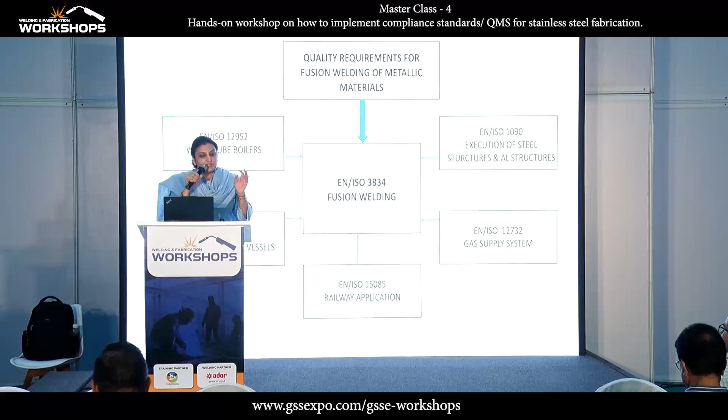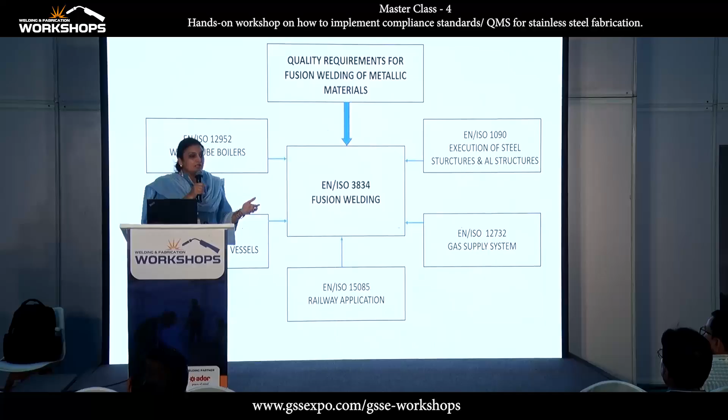For all of you who are here, I would like to introduce Mr. Pandita. He is a person of excellence with knowledge and expertise. It's not just theoretical knowledge, but practically implemented and implementable knowledge that we put forth today. The main problem for the fabricator is how to convince their vendors or whoever they are supplying to that they are compliant with the codes and standards they are supposed to follow. There is a lot of confusion which we want to clear today through this session. I'm sure those who are attending will go back with clarity.

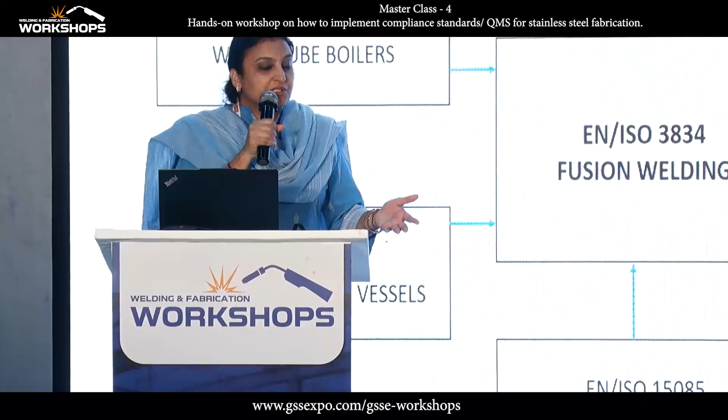I think that's somebody here. I have 48 years of experience in fabrication, building and quality, working with various companies on quality.

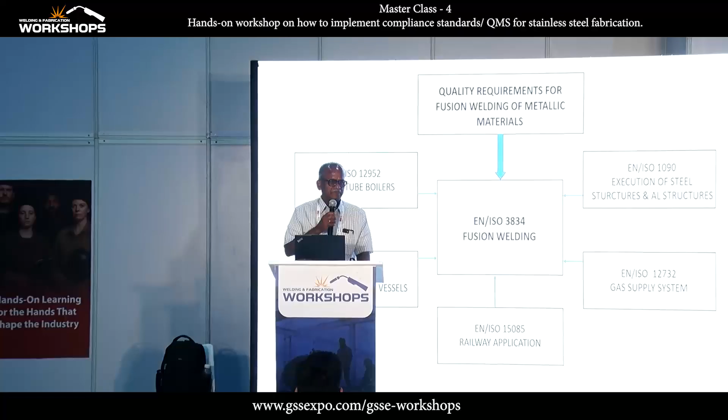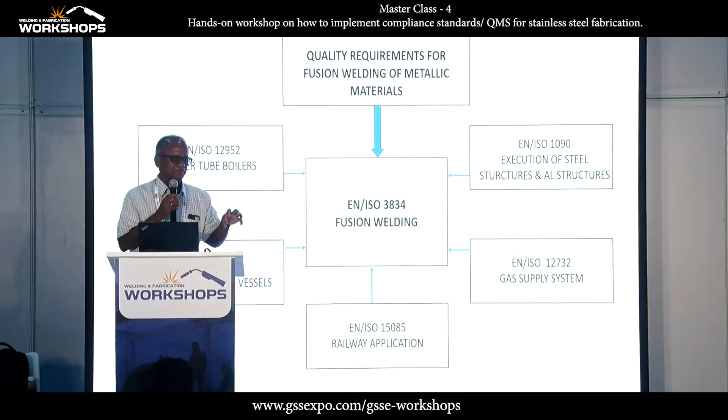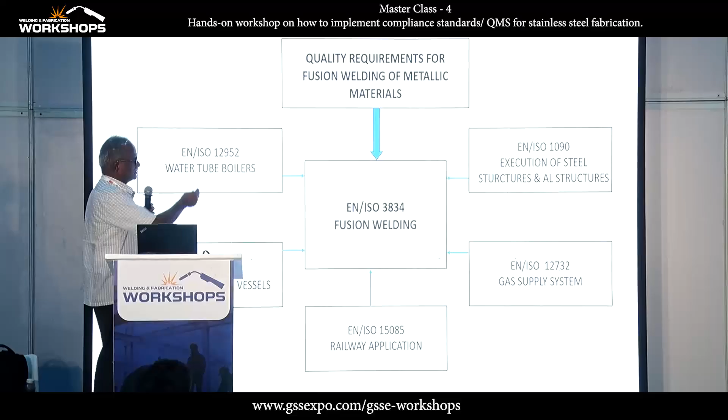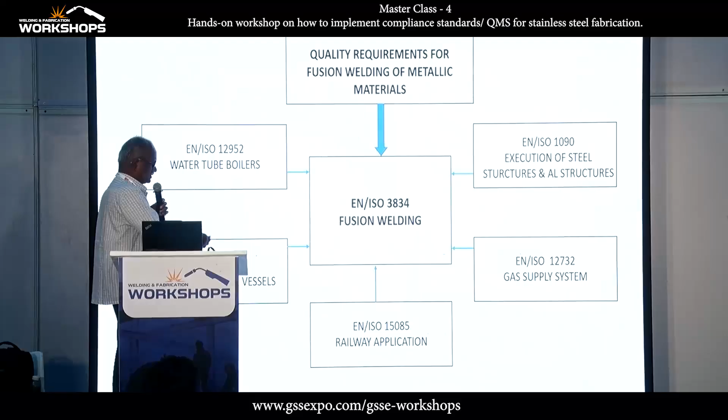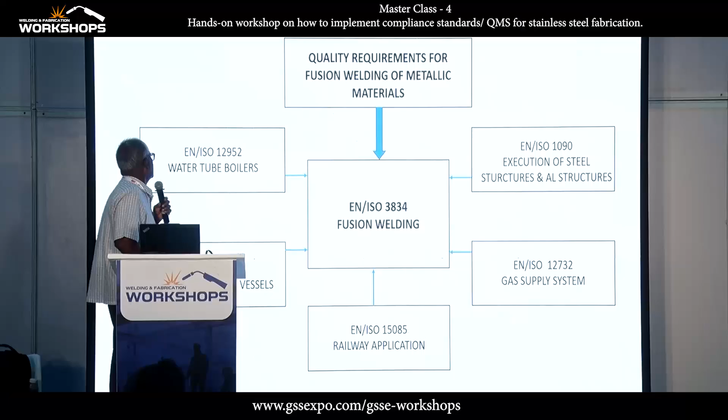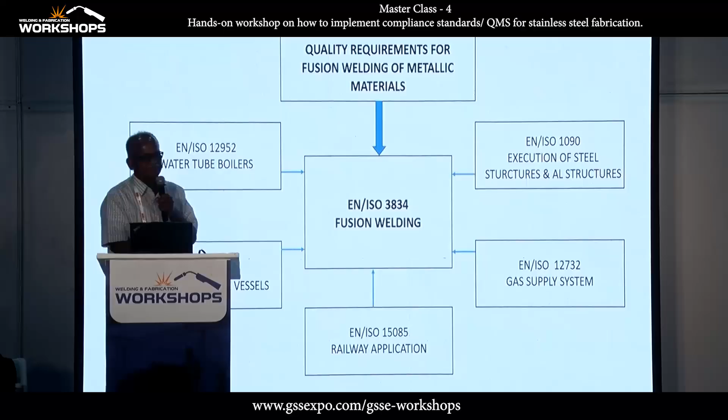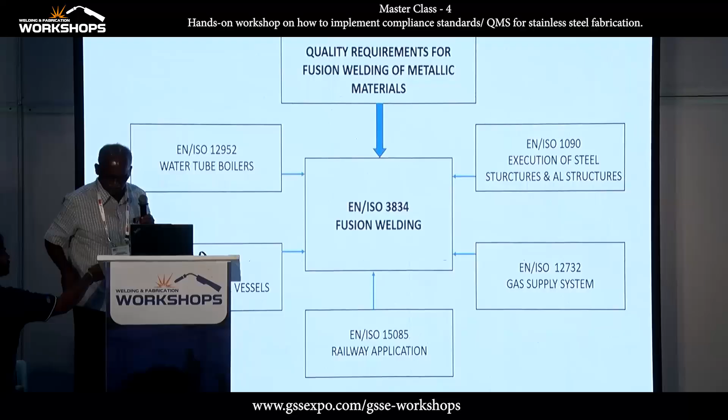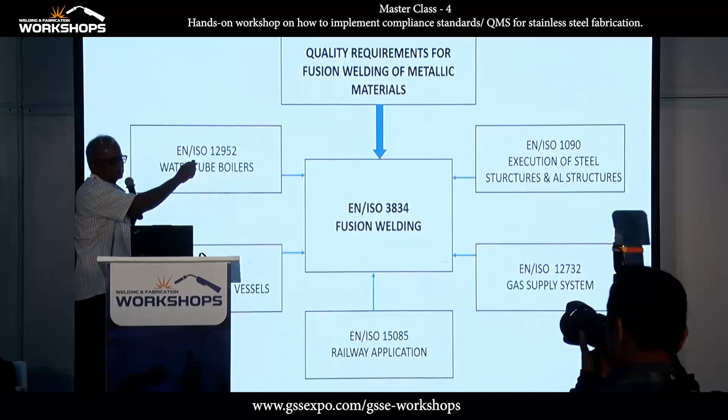This is not really fusion welding. You might be knowing fusion welding and solid state welding as well. This takes place through welding above the melting point of the material, but solid state is below the melting point of the material, like resistance welding. We'll go further.

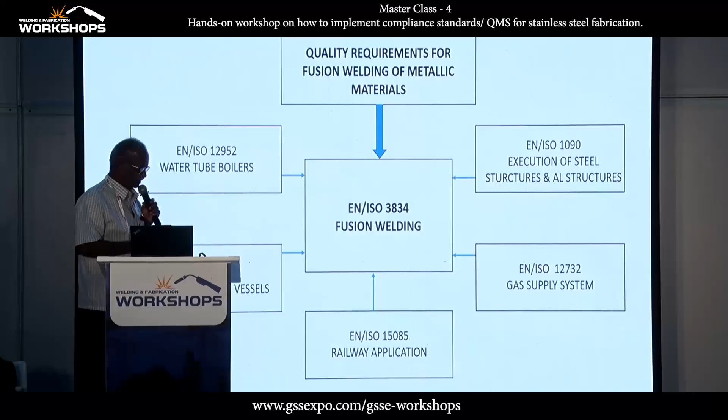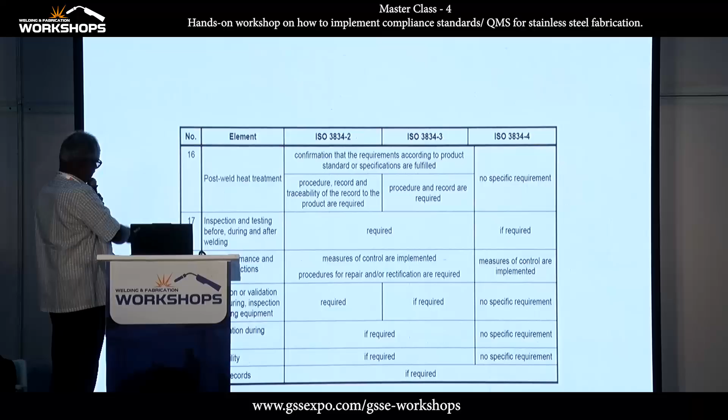After all this, there are three quality systems there. It's a comprehensive standard, generally used, but really it's in pieces — there are now 22 elements in this.

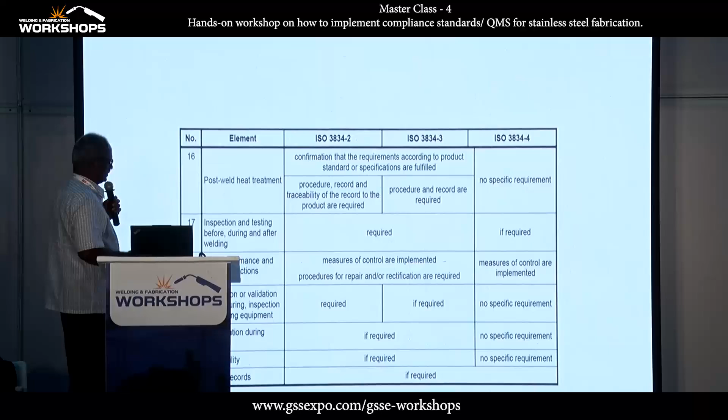You just take the top points. Once you get the purchase order from the customer, you have to read it and understand what has to be done. You have the facility, and it goes one by one. Suppose the fabricator needs some technical review, then subcontracting — if you want to give it to subcontracting, you have to decide at that stage. Everything has to be decided at this stage.

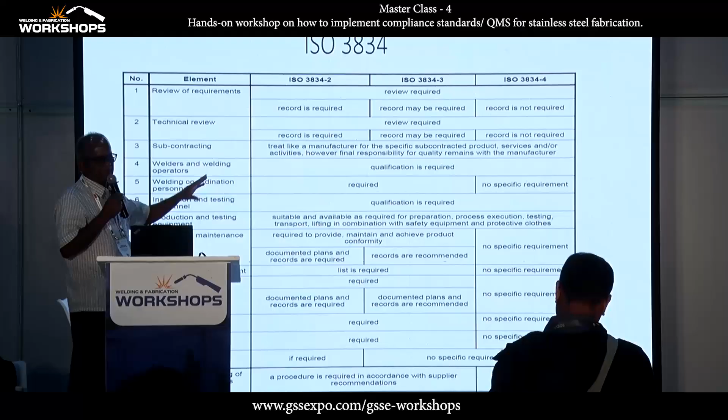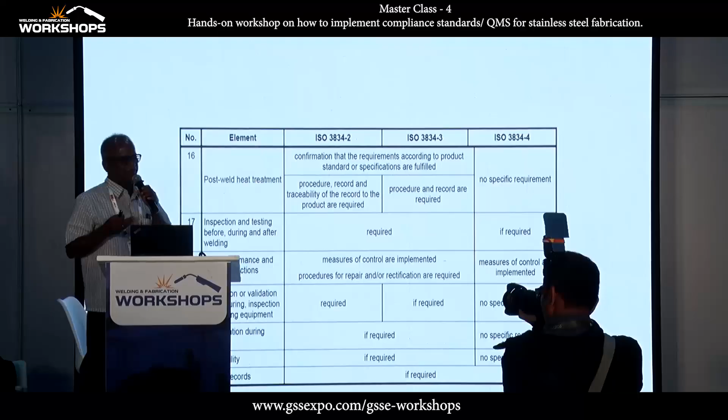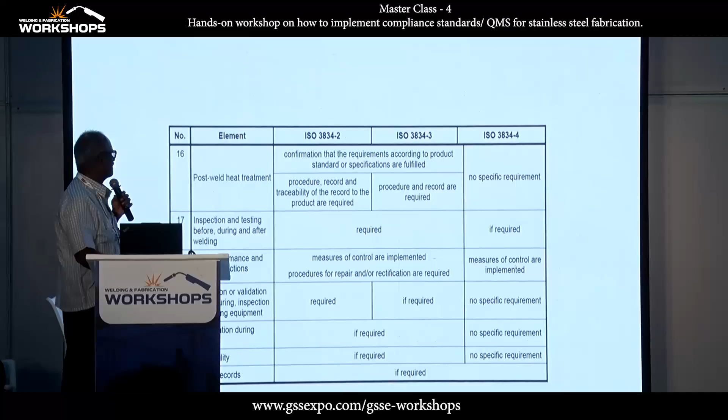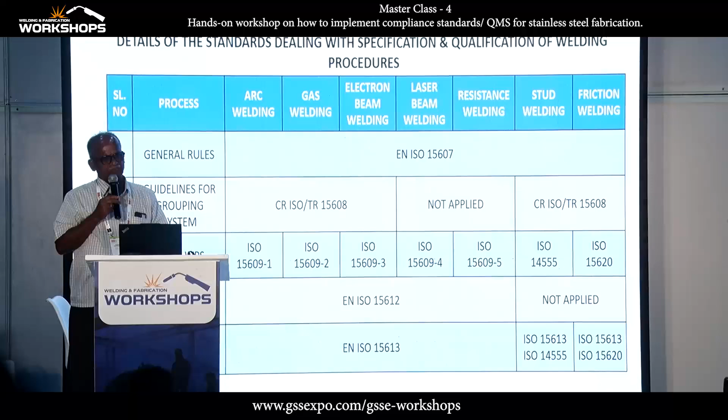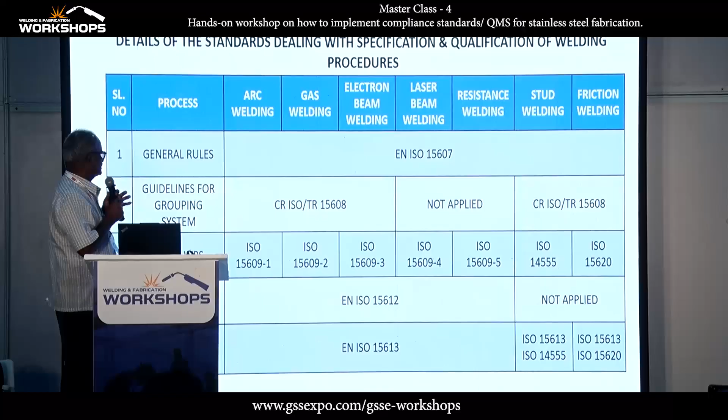607 doesn't give a lot — how to qualify the WPS, yes I can do it. 15607, but this is not good, not the better thing. You see, in ASME there's a lot of different sections. In ASME, you can refer to only 5 books — that's enough. For qualification, one book is enough, Section 9 is okay.

Then for pressure vessel and heat exchanger products, you go by Section 8; for boiler, Section 1; for nuclear, Section 3, and so on.

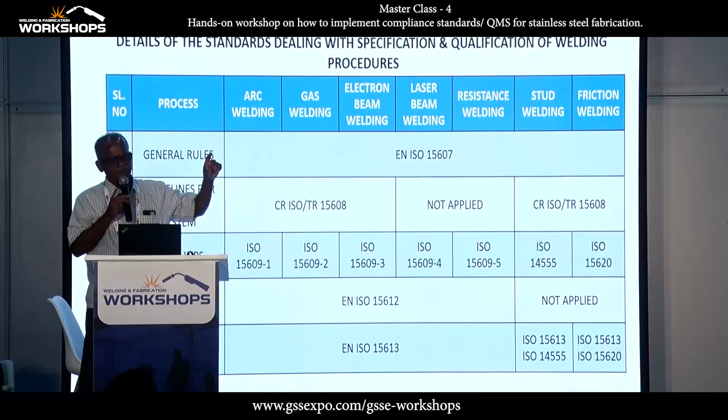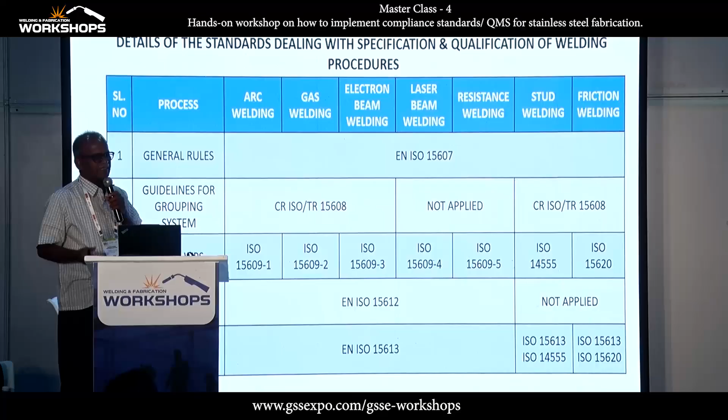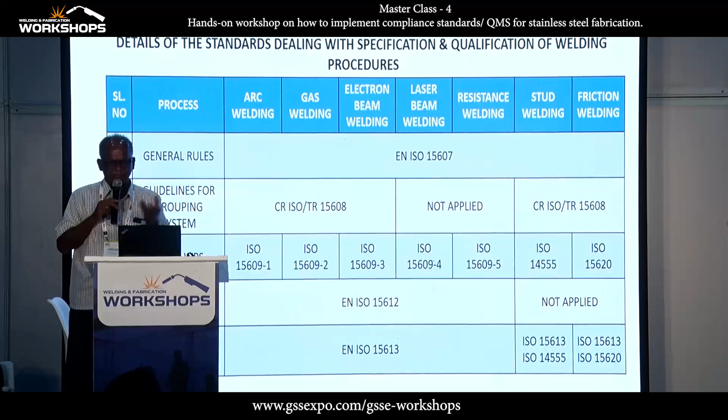If the ASME, I think you might have come across, you weld the PQR, we may not write any preliminary WPS or anything, just let them start that one. But here you have to do the preliminary WPS you have to write before starting the WPQT, welding procedure qualification test.

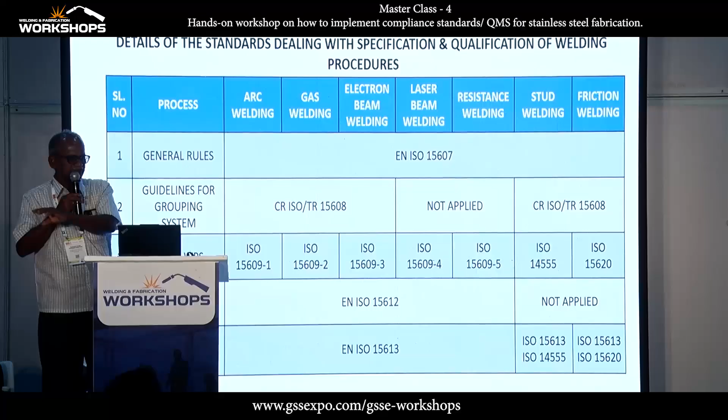Here, WPQR will have the range. In ASME, PQR will not have the range. Only WPS will have the range. We might have come across that. Here, WPQR will have the range. Suppose 10 mm you have done, 5 to 10 mm that range, for example, will be on PQR, not on WPS.

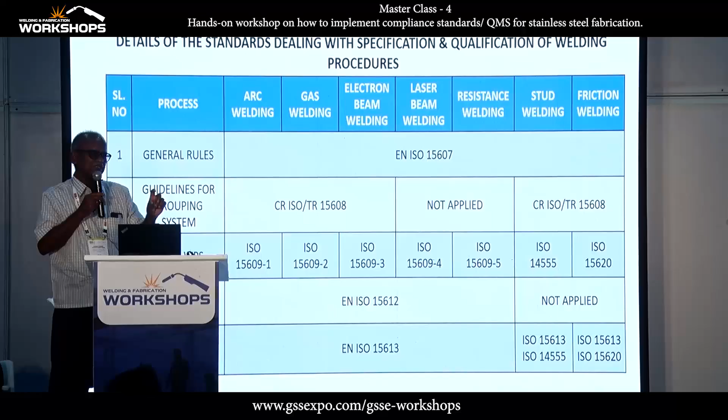But here, in ASME, PQR will not have the range, it will have only actuals, about 20 or whatever. WPS only will write there. That's the difference between these two.

Then first you have to write the pre-WPS. After seeing your drawing, about thickness or active material, all you have to see that. Then you make a preliminary welding plan and fabricators. Then only you can visualize how many PQR you have to do there, for whatever process you get involved on that. Unless you get the preliminary welding plan, it is difficult to find out. By experience, people do not only rely on the paper.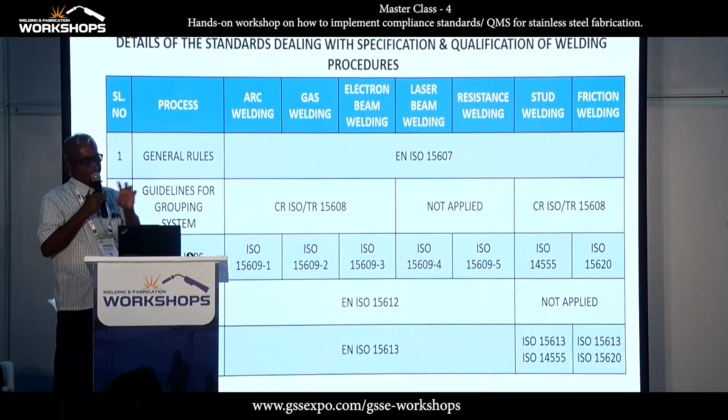That's a different issue. But here it is always better, even for ASME also, not only all the requirement in the form of weld map or weld plan, whatever we say. Then from there you can start the pWPS.

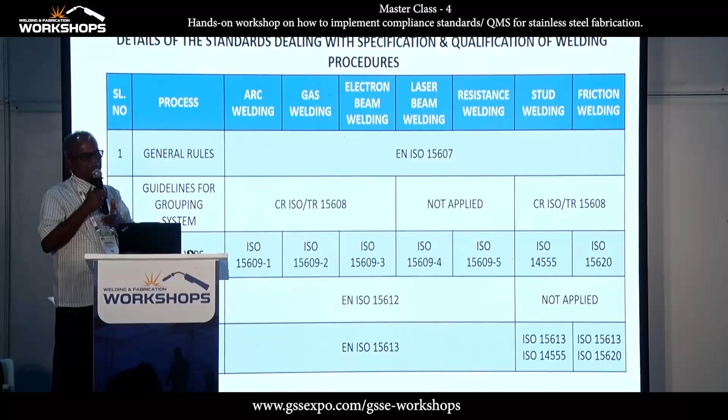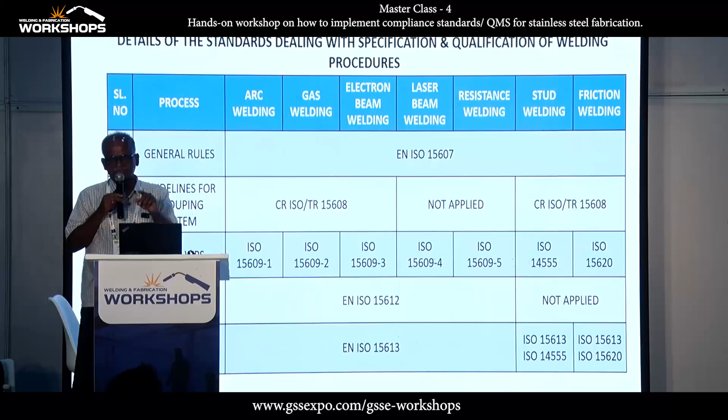Then welding procedure qualification test, actual test, what is that. The difference is the examiner, outside examiner or inside. Company has appointed a person like you to be an examiner for the witnessing, certifying all the things. Otherwise, it should be independent of the production, another thing. Otherwise, outsiders, not of outsider, third party inspection, they have to examine, audit, they have to witness.

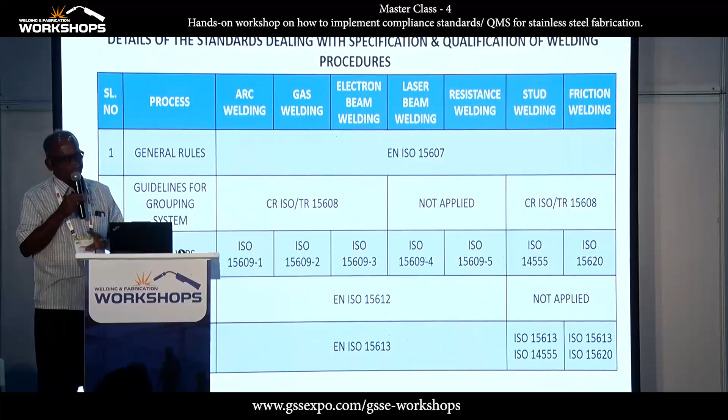Did this. But in ASME, the manufacturer has the responsibility. They are also aligned with the ISO. Recently some revisions have taken place in ASME also. You have to appoint one welding coordinator for this in ASME also.

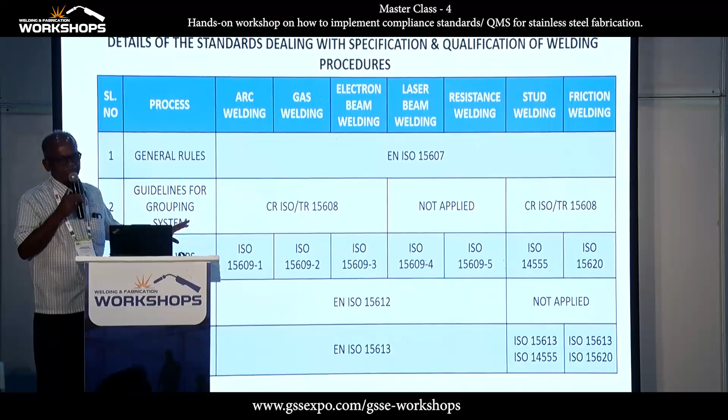After that, they prepare the WPQR record. Then you have to make WPS. From WPQR, you can make any number of WPS based on your position of the welding, thickness, whatever way you want. That will be given on clause 15607.

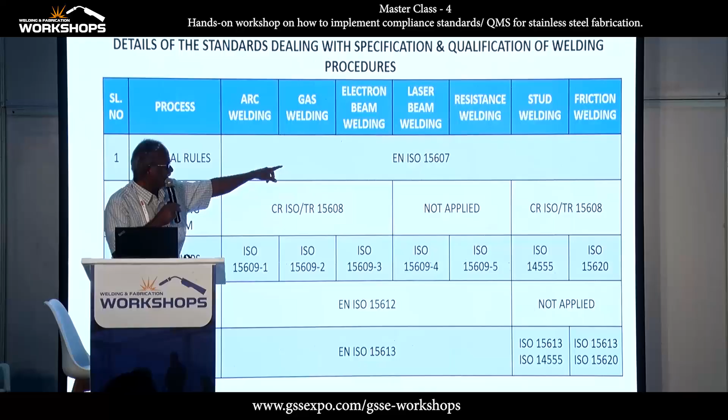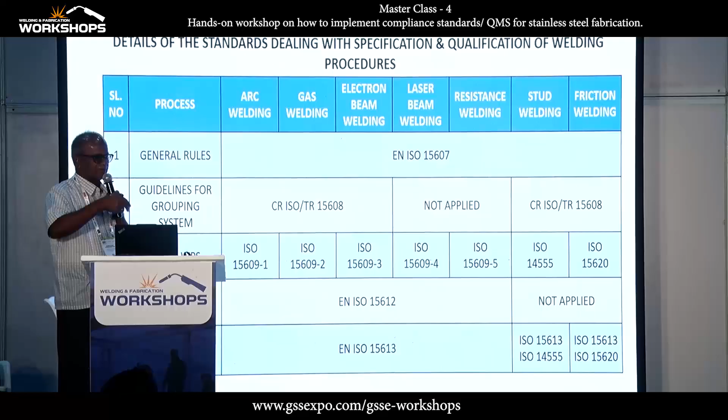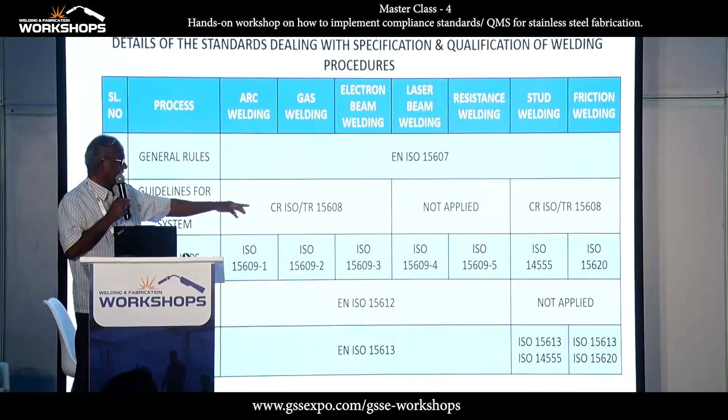One PQR will have so many WPS, like your one section. That itself is your instruction back, instruction for that purpose. But in arc welding, there's a lot of WPS. Then you will start welding, then friction welding, resistance welding, many things are there.

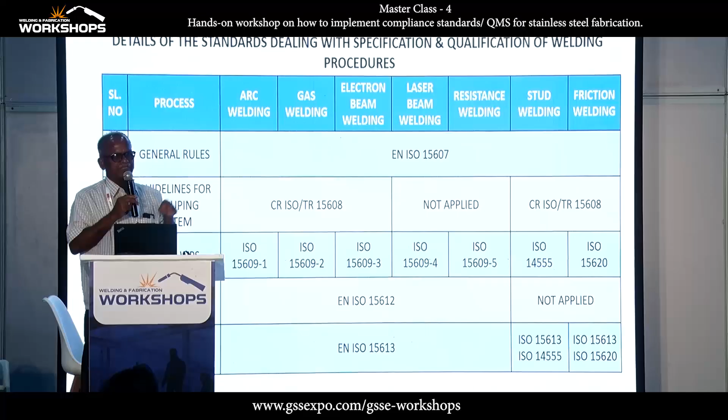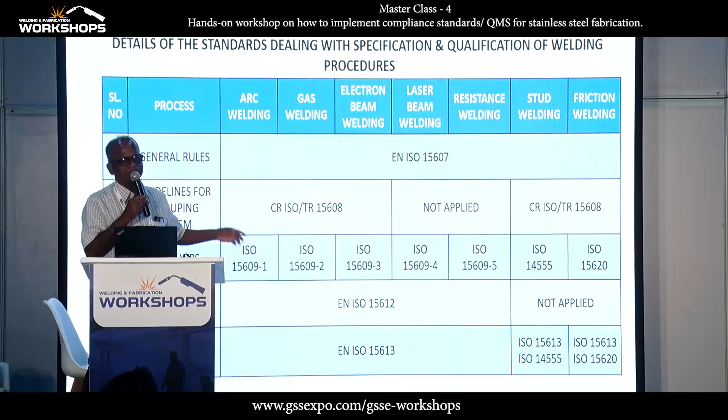Procedure by pWPS, that's a manufacturer. And qualification for any method, manufacturer, your applicable exam, examining body. Both.

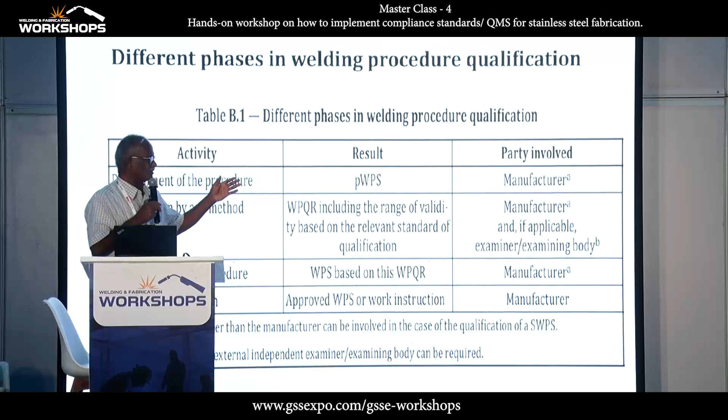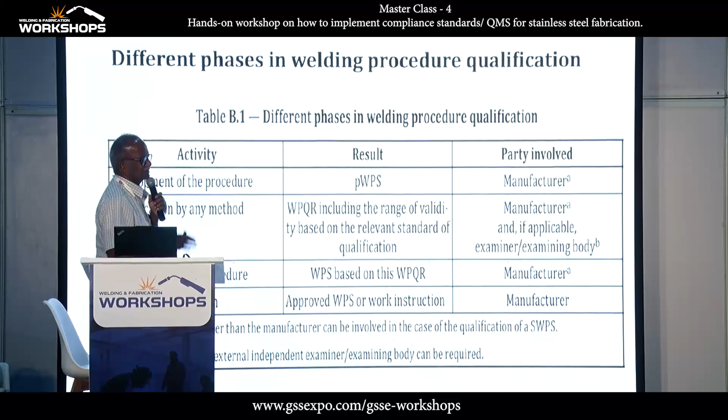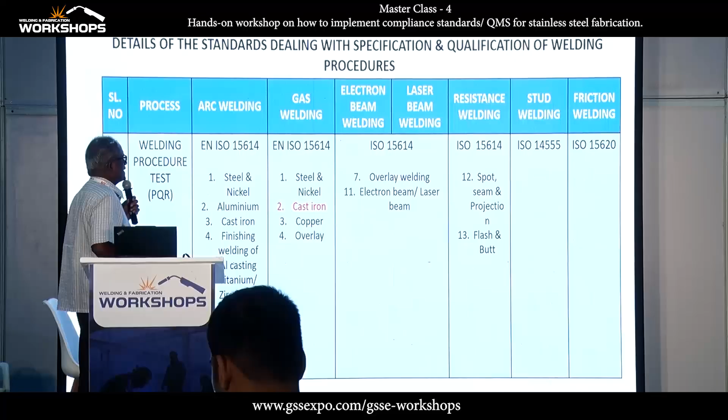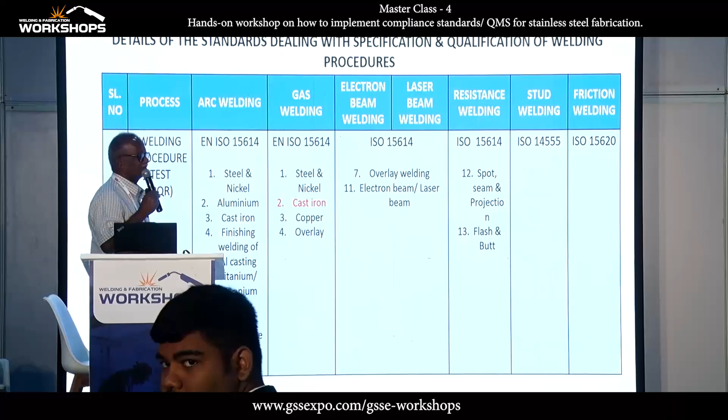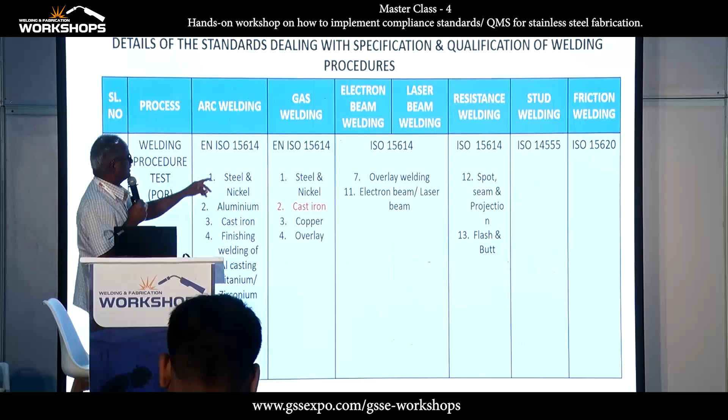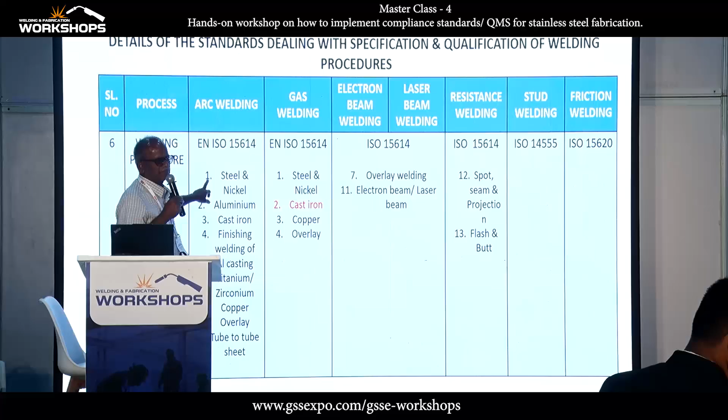WPS, based on your wealth map, there you can decide whether it is available or not. Available, no further action. Not available, no, but available, no further. No means you have to go like this, this space you have to do this.

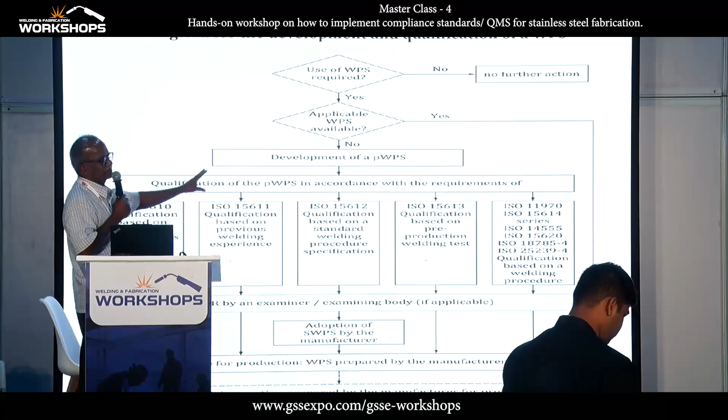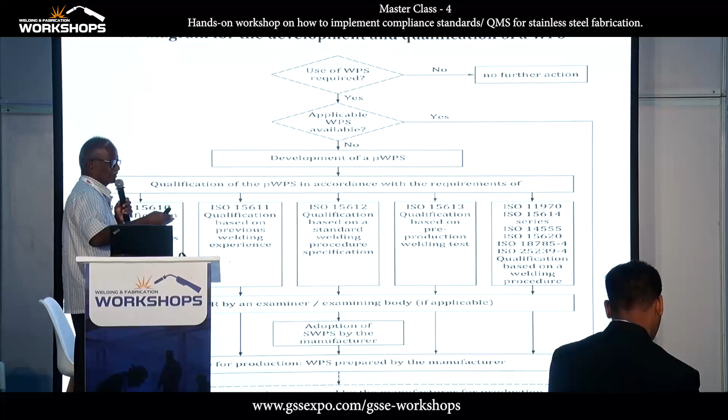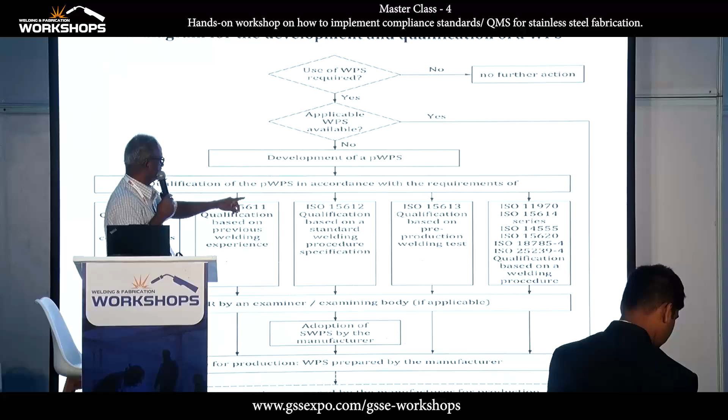GPS, separate person, not like what you are doing now. This should be nominated by the company. He's a welding coordinator. All right, then the qualification also 14731, we have to know, many elements are there.

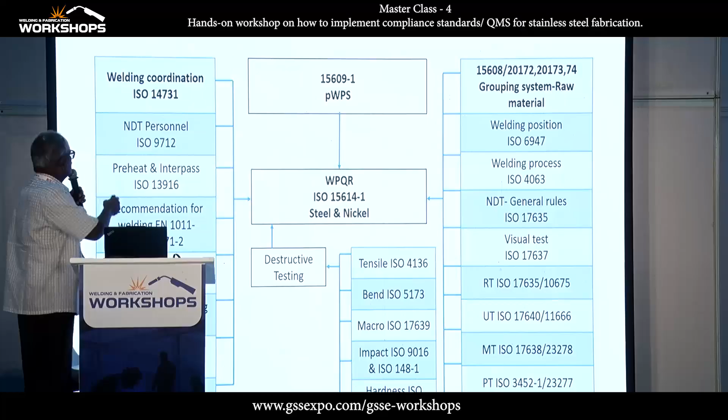You should understand what is what. Otherwise, you should have some IWT or IWE like that. You have that one, because you have experience, company appoints. Years when you are with the awareness of 14731, okay, no problem.

Suppose you are doing a railway component, but I don't have any experience on railway component. But IWT, they don't repair much. They should have some experience, then they will appoint as a coordinator.

Nowadays some changes, they should not. NDT personnel should be 9712. VT, PT, all they should have qualified minimum level.

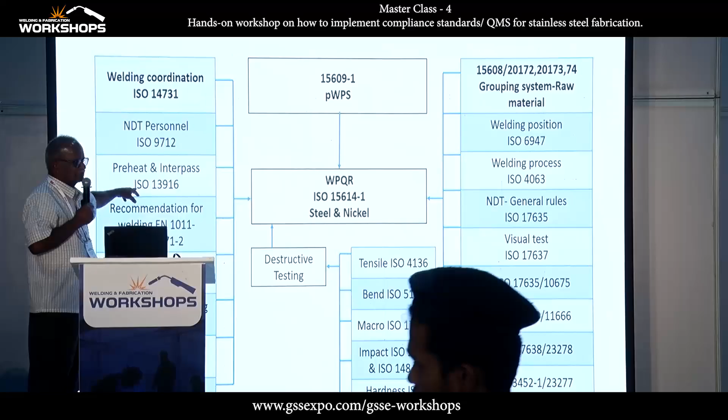Visual test, visual is very important, to the bottom and the clean interpass, you can go and check how to measure it, from where there, that procedure they follow.

13916 recommendations are there, earlier it was 1011 dash 1 dash 2, but number is changed now like this. It is how to calculate the preheat temperature, what is the fabricator interpass temperature, and this procedure will be on this one.

Recommendation, can I speak? Based on your carbon equivalent, based on the hydrogen content, thickness, anything, heat input. Heat inputs based on your pWPS heat input. Other parameters given at that one, you have to calculate the preheat. Okay, but this one's preheat.

We don't interpass also. Definitely, most of the people where I have visited, they are not following this one, they are following the accreditation, no? There's the national accreditation body, they are doing that one. But here they are supposed to be there.

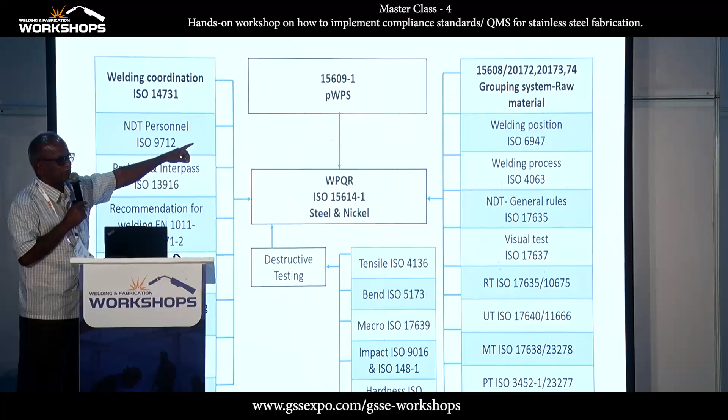For that purpose, but specification is there. You go for 20172, that's the EN standard equivalent - X2, CR, NI 910, like that they are given. Then how to find out this group number? Go for that 20172, there will be X2, chrome, nickel, 910 will be there, then correspondingly the number will be there - 8.1, 8.2.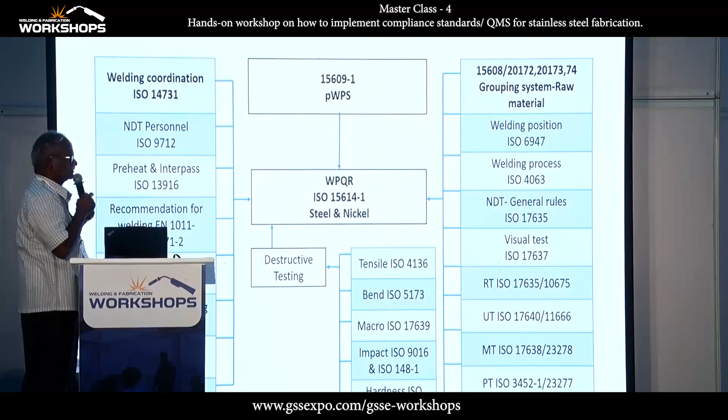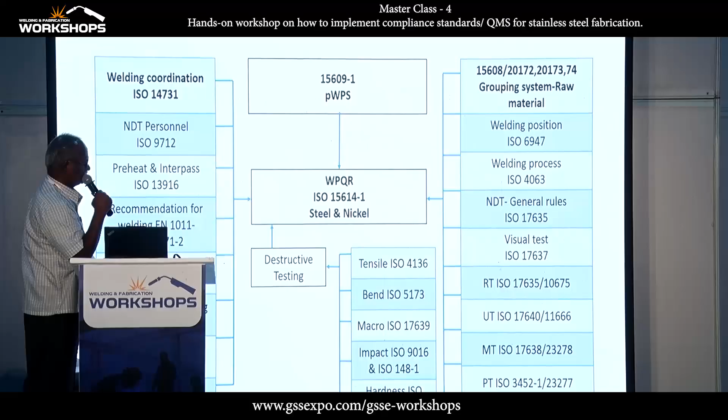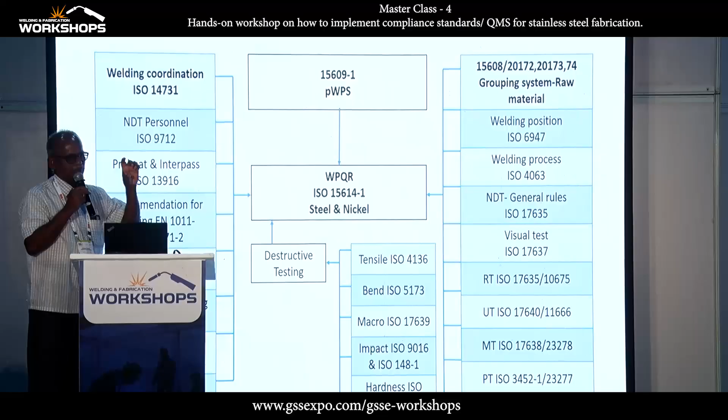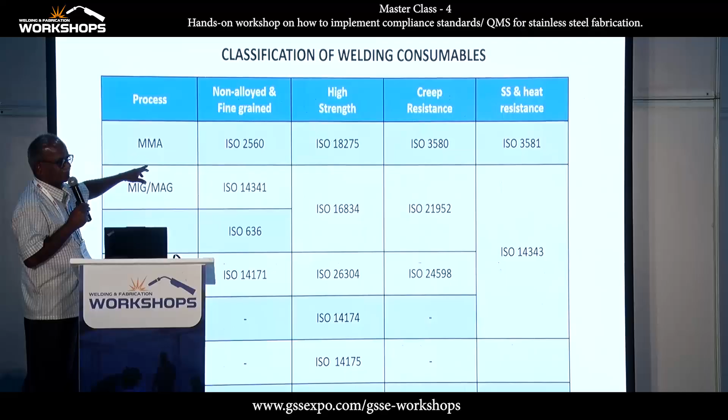Non-alloyed, fine grain, high strength, creep strength - this comes under individually, but all will come in one in section C. Part C, you will find all in one book. This is a separate one.

Then, what is the design? The consumable, welding consumable - wire, no? Wire. Code case 14171, fluxes 14174 - they have two systems, A and B, based on the yield, based on tensile. But they will yield only tensile or yield. Their classification will be based on the two systems - yield strength or tensile, it's A or B. As per your requirement, we can choose that. But yes, will you want?

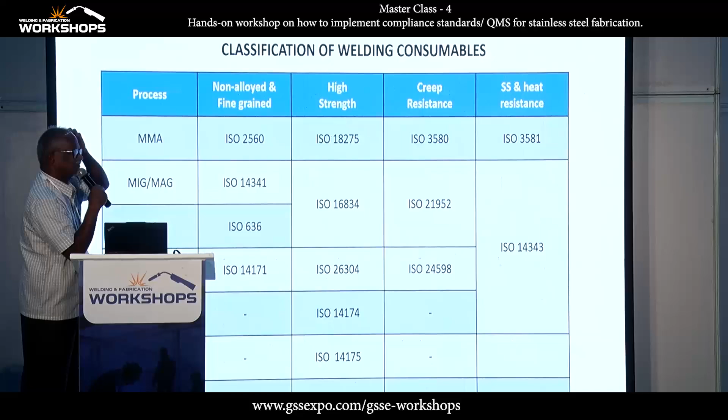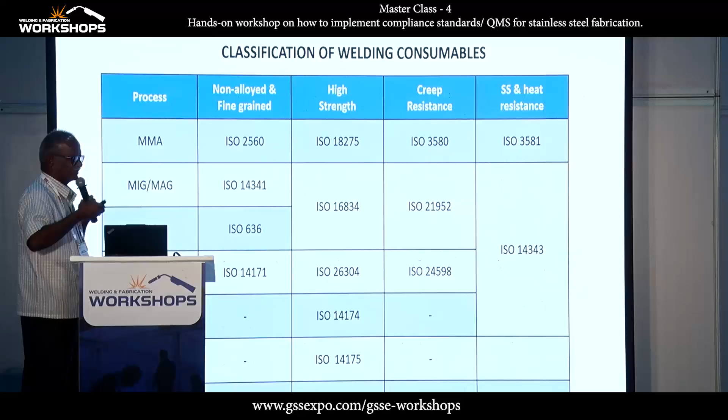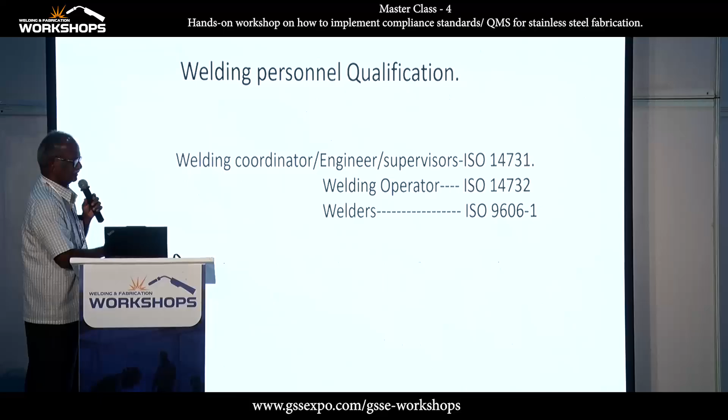Personnel qualification - welding coordinator, supervisor, like that. Operators 14732. Welders 9606-1, -1, -2, -3 is there. This was for steel, -1. Everyone else - what is it, man? Just put it up. It's an element of 3834.

Standard picture, once you... Part 6, and it's what guidance how to implement, the latest one. How to implement the sub, typically give it some idea.

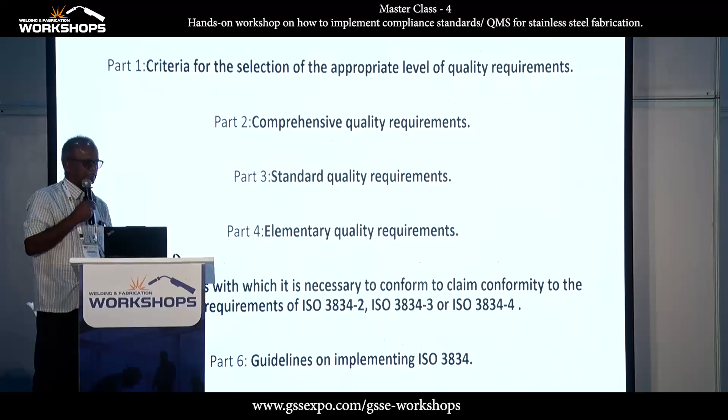Okay, one option - another one is DM water, no? Spray it, or use a banyan cloth to take it. Yes, you have to take away the heat very fast, otherwise stainless steel has more latent heat. If you take the heat like carbon steel, you should not leave it immediately. If you leave it on its own, we cannot predict when it will discharge - it becomes very difficult to determine. That's why we use DM water, not any other.

Yes, chlorine should be less than 35 ppm. What is it? Chlorine should be less than 35 ppm - chlorine, chlorine. Always use DM water.